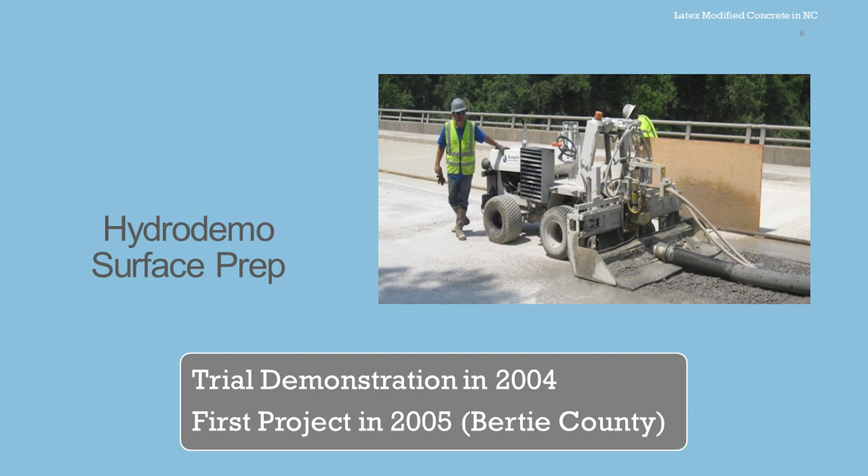I did get some help. North Carolina DOT, Aaron Earwood, sent me a few photos and some information. This looks like one of the first adventures with hydro-demolition here in North Carolina in 2004, a demonstration project out in Bertie County, which is in the eastern part of the state, up there in District 1.

What I did was, Hydro-Technologies here, through about the last 10 years, has been kind of taking in data as the lettings come out from various states. So I was able to latch on to some of that and pull the information I could out of the North Carolina side of the lettings, to show projects and bridges that had been let in the last 10 years or so using hydro-demolition technology.

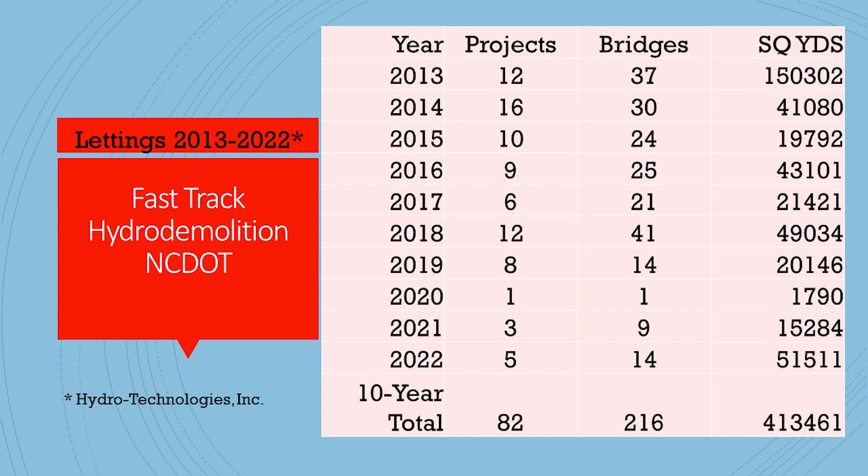I think it's fairly decent. It could be off a little bit, but at least it gets you in the ballpark as far as what amount of work is being processed through the DOT. So you can see about a little over 400,000 square yards of hydro-demolition work, 82 projects, 216 bridges. Pretty good chunk. And for the southeast region, I'd say that's probably leading the region as far as the states that are active. Virginia's probably pretty close right behind there too, I would say.

Just another look at data. I kind of broke it down by districts. Might be kind of hard to see on the screen, but you don't see nearly as many bridges done in the eastern part of the state. I think that leads back to the discussion yesterday about the number of bridges and the size and conditions you encounter from east to west.

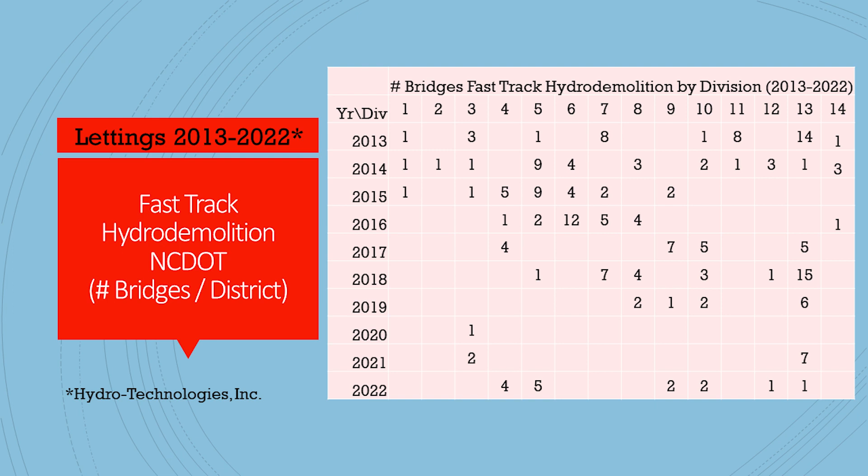The western side gets a lot more deterioration, and there's longer bridges, so you'll see more square yardage, possibly like in District 1. They've got a pretty big bridge there, it looks like that they did. So you don't have as many bridges in the east, but you have bigger bridges with a lot more area. It just kind of shows you the trend there.

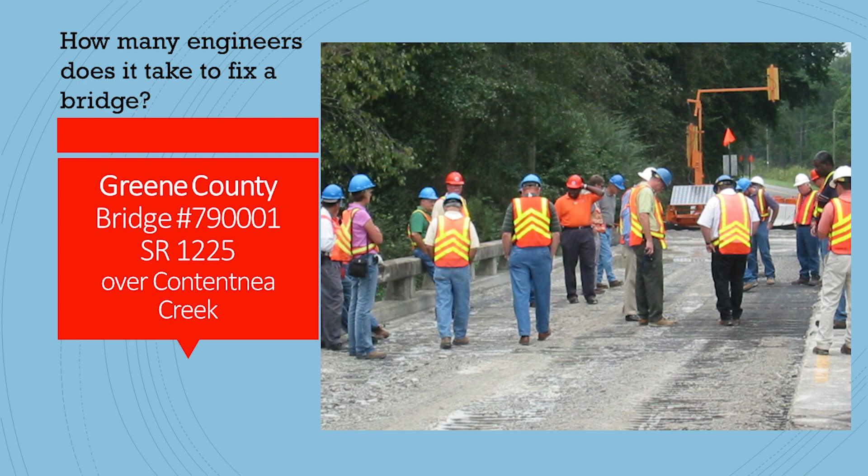So just to highlight a few of the bridges, this is from Greene County, one of the very first bridges undertaken by the department. When you get a new process, new products, everybody out of the office wants to go out there and kick the rock around and stomp on the rebars, to see what the new toy is all about. This was a fairly modest bridge, 241 feet long, fairly low ADT, not a real big bridge, but a good starter bridge to get the process going and see how the whole thing works.

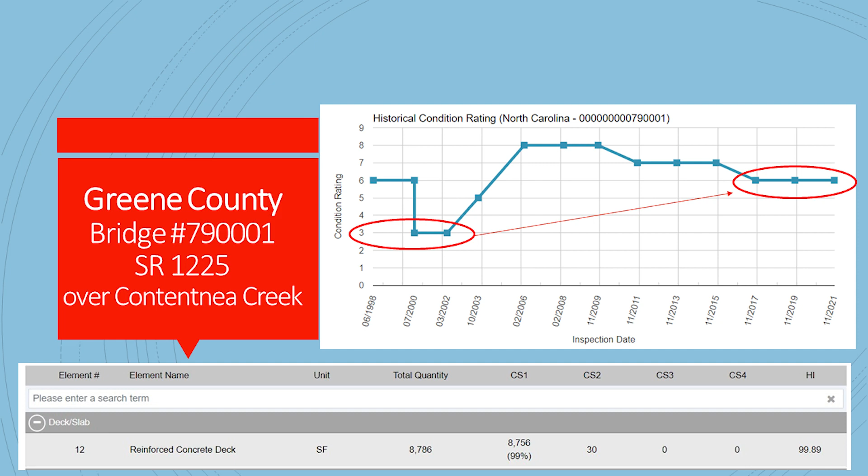What I'd like to do is dig into the data a little bit to see how it performs. It looks like this bridge was actually down in condition 3 as far as the NBI rating for the deck, according to the Info Bridge data I pulled up from the federal data. But it looks like after 15 plus years or so, you're still holding a 6 on that bridge. So it's doing its job.

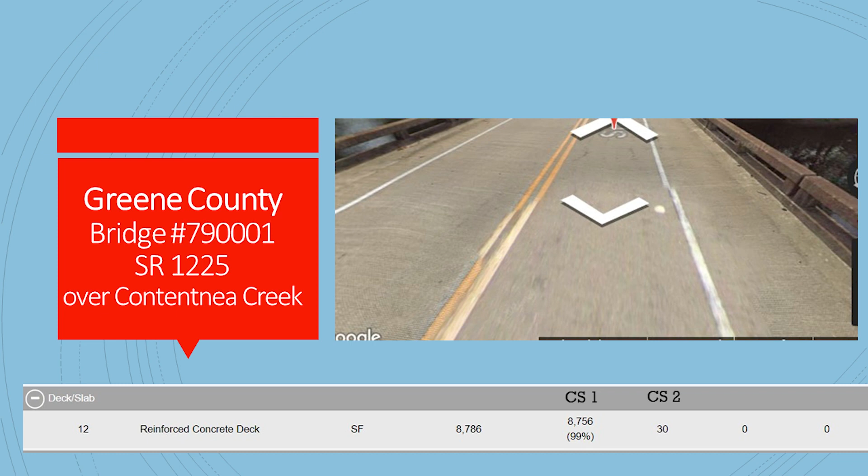You take a 3 or 4 rated deck, that's pretty deteriorated, and trying to salvage those things can sometimes be pretty tough to do. Really, they're kind of deck replacement at that range. But a lot of times you just have to do what you have to do to keep the bridge open. So this is just a screenshot from Google Maps.

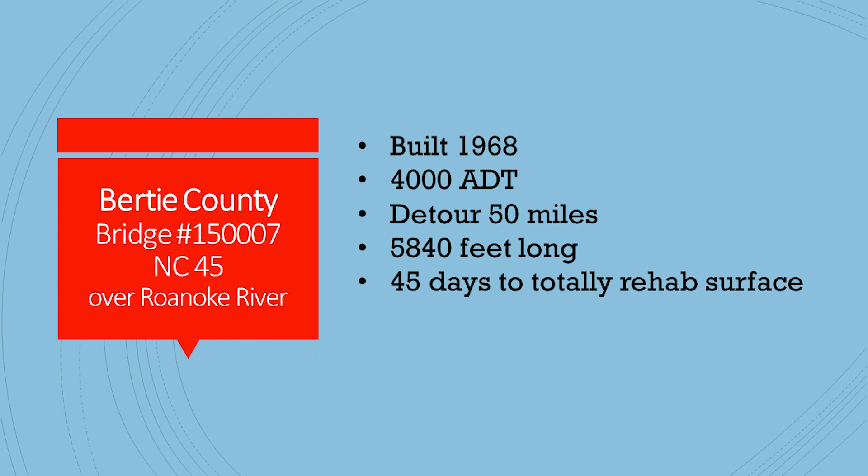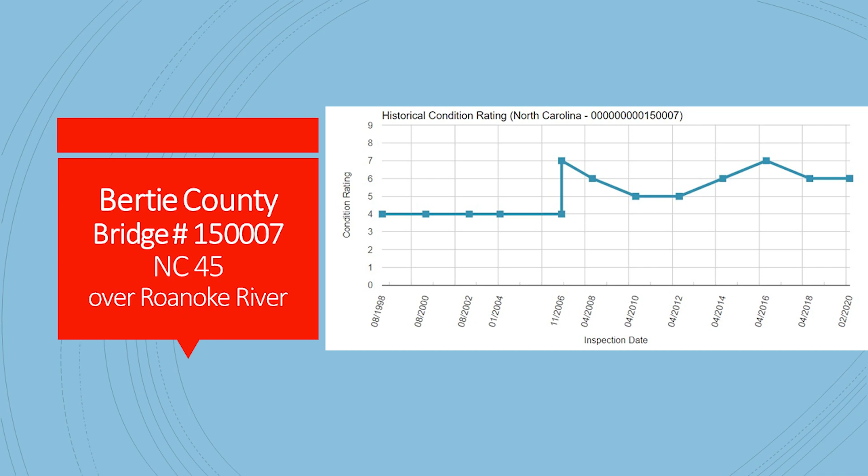Another bridge out in Bertie. This was a pretty good size one out over the Roanoke, a little over a mile long. 45 days to totally rehab the surface. One thing I noted there was the detour, 50 miles to get around there, 4,000 ADT, and a 1968 vintage bridge. Again, you're looking at a deck that was in the 4 range, but now it's still holding in there at about a 6.

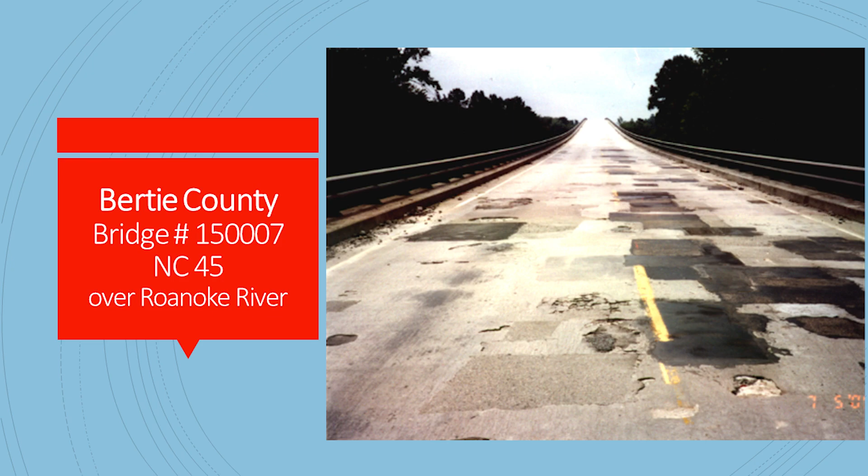So that's pretty good performance for an old bridge. I tried to go into some of the element level data to see if I could pick anything out of there. Kind of hard to get a lot, but you can see the slab itself, for the most part, is still in condition state 1. These are some of the pictures from that bridge. If you look at that you see what you have, you got a real minefield there. So a little bit of the operation to mill it and to hydro.

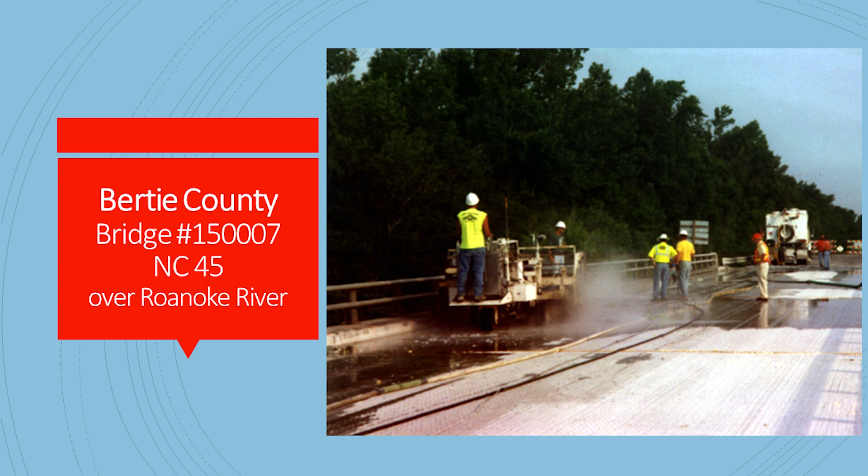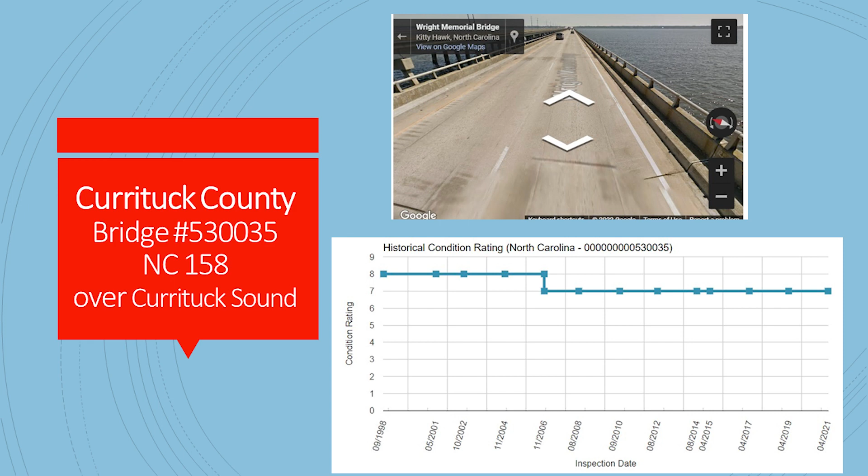Another one up here in the far northeast, Currituck. Actually, Rick Nelson kind of tipped me off to this one. He mentioned this was one that had a really rough ride in it. So this wasn't necessarily a bad condition, it just wasn't riding very well. Hydro and latex was used to get it smoothed out and riding better. It was about a 2.8 mile long structure, looking at a lot of square footage there.

And then one more, since we were down in the Carolina Beach area, might as well take a look at it while we're there. I was able to get some shots out there Monday. This is down there over the Intracoastal Waterway.

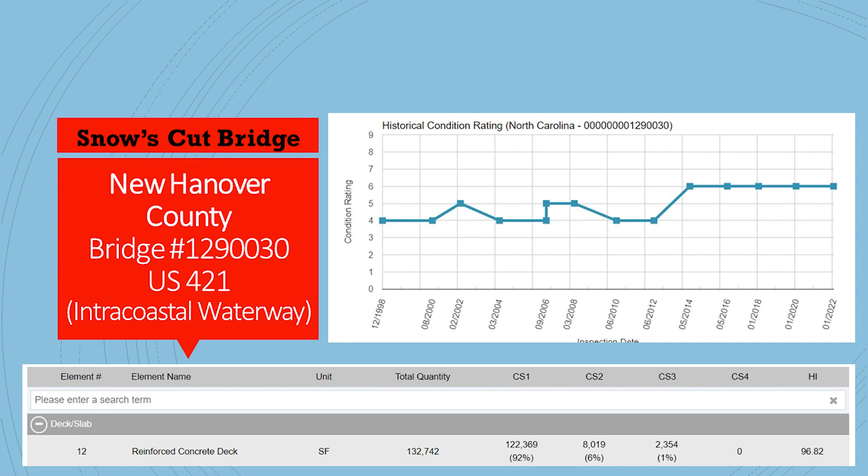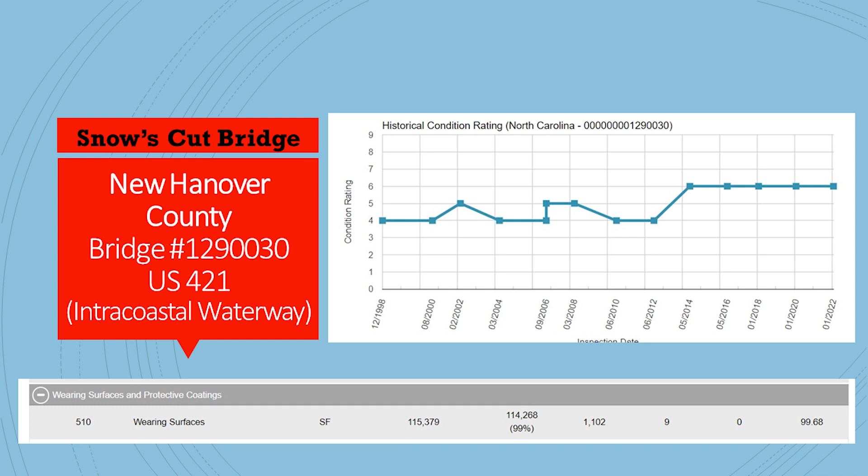About a half-mile long bridge, 132,742 square feet of deck. This one was done back in 2012, so about 10 years on the bridge. It went from a 4, and it's hanging in at a 6 right now. The deck, the wearing surface data shows most of that is still in condition state 1, with a little bit in condition state 2.

One of the challenges I was finding as I was going through the data is I'm pulling data from item 108 out of the federal tape, which is the wearing surface on the structure. I'm looking for code 3 for latex modified concrete overlays. What I'm finding, and this isn't unusual, it's not just North Carolina, I find this in a lot of states, is when we go in and hydroblast and put on a new latex modified concrete wearing surface, we're essentially reestablishing the deck slab itself.

It's not like the traditional means we used to use where you'd just mill and patch and then put a true wearing surface on. Now we're actually reestablishing the slabs. So what I'm finding is agencies are basically coding it as monolithic, code 1. That makes it very difficult to track and pull data out to find out how those bridges are performing that have hydro-demolition surface prep on them. It's just a little tougher, and I guess that's something agencies kind of deal with internally as far as how they accumulate that information.

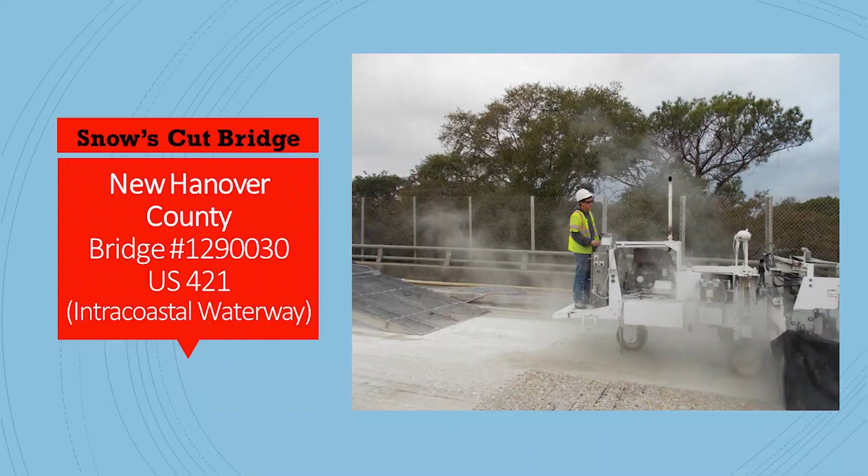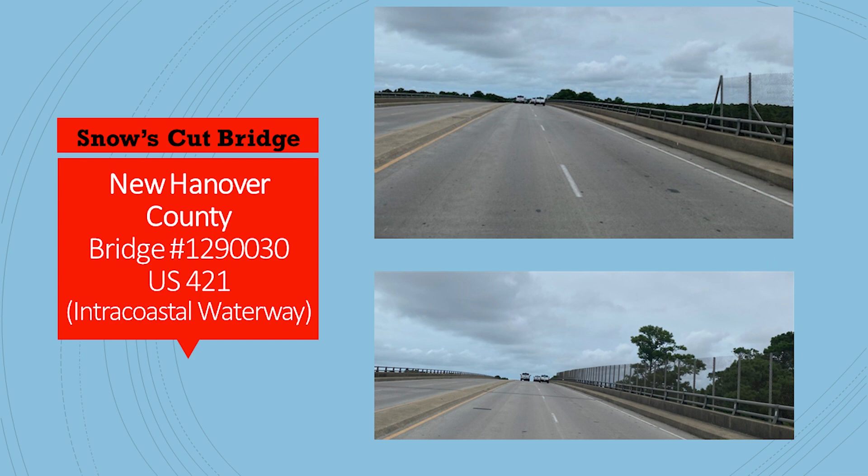This is from that intracoastal waterway, just some shots of the surface itself. It looked pretty good. I walked a good portion of it and couldn't even really find any cracks in it, hardly. There were a few minor patches out there, and one expansion joint that looked like it had some repair work done to it possibly at one time. But overall, looking pretty good.

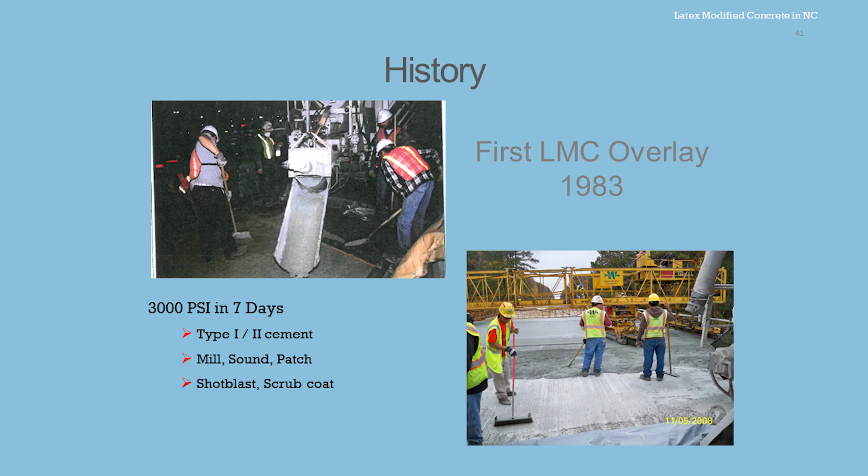So I talked a little bit about hydro-demolition. Let me switch gears and talk about just latex modified concrete wearing surface. The history on this in North Carolina goes back to the early 1980s, which is pretty similar to a lot of states. A lot of states were doing this back in the 1980s timeframe using type 1 cement. The process back in the 80s and 90s was typically you'd mill, sound, get in there with jackhammers and patch it out, reestablish your deck surface, and then go in and do your final cleaning, apply a scrub coat, and lay your overlay.

The nice thing about when we got into hydro-demolition, we were able to eliminate the application of the scrub coat. Plus we're getting a lot more bondable surface area, and a lot better surface preparation, I believe, for your overlay installations to hang onto there.

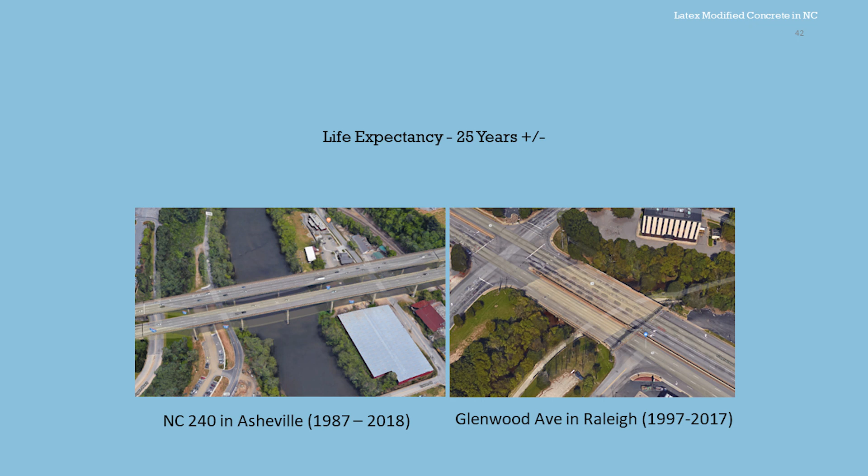Just a few pictures - these are a couple Aaron had passed on to me. Some bridges have been out there 20, 25 years in life, that's kind of what the expectation is for most of these overlay systems. I will say, I think the sooner you can get into the bridge deck and get your overlay on before it deteriorates, your odds of getting more life are greatly enhanced. I know some new bridges that latex overlays have been installed on have been out for 35, 40 years and have very minimal to no chloride intrusion into the decks.

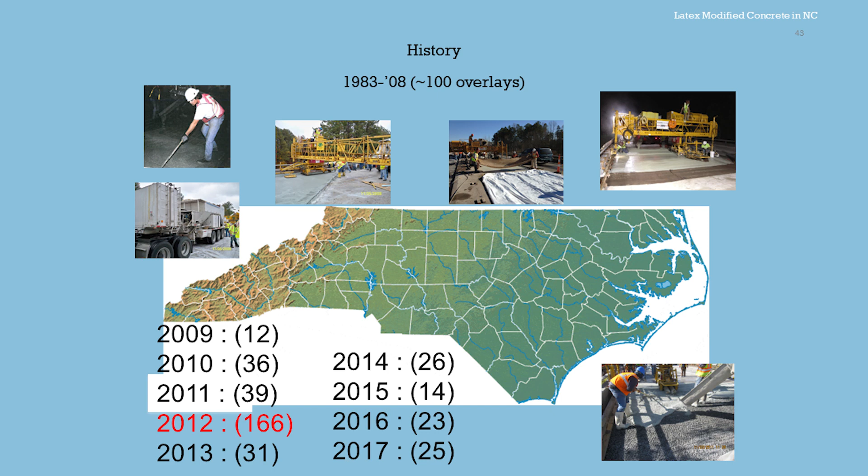This is a look at the number of overlays out there. Looking at the time period from '83 to '08, probably did about 100 or so in the state of North Carolina, and then you can see in 2009 through '17, that number has increased quite a bit through those years.

I was out looking at several overlays, actually several dozen overlays in the Raleigh area, and that's where I started to find the discrepancies in the data, which got me investigating the coding a lot more.

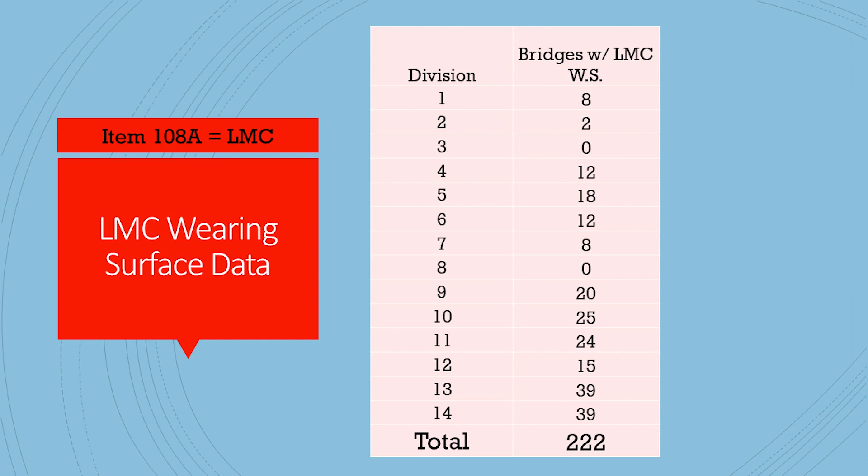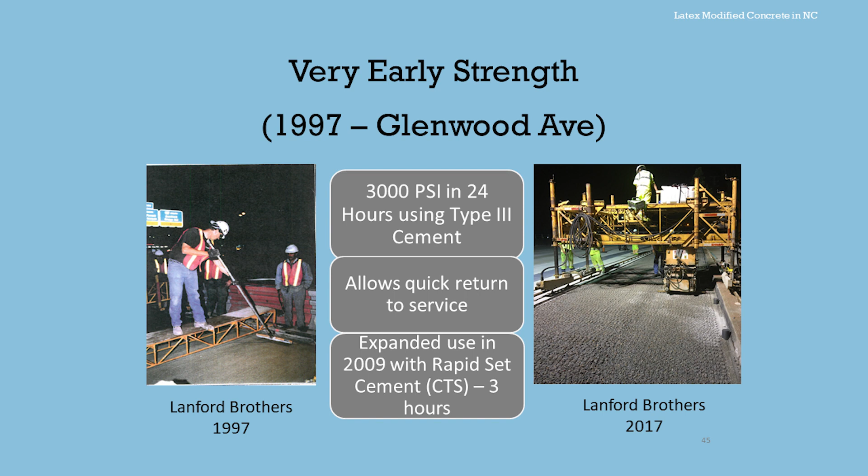The wearing surface data within North Carolina's tape looks like it shows about 222 installations, so I think a lot of those hydro installations aren't showing that latex surface that's also on those particular bridges. And then the very early high strength latex mixes came into play in the late 90s, including use of type 3 and also the rapid set, which is a 3-hour strength gain.

So I've got several charts here. They're real hard to read here, so I'm just going to breeze through those.

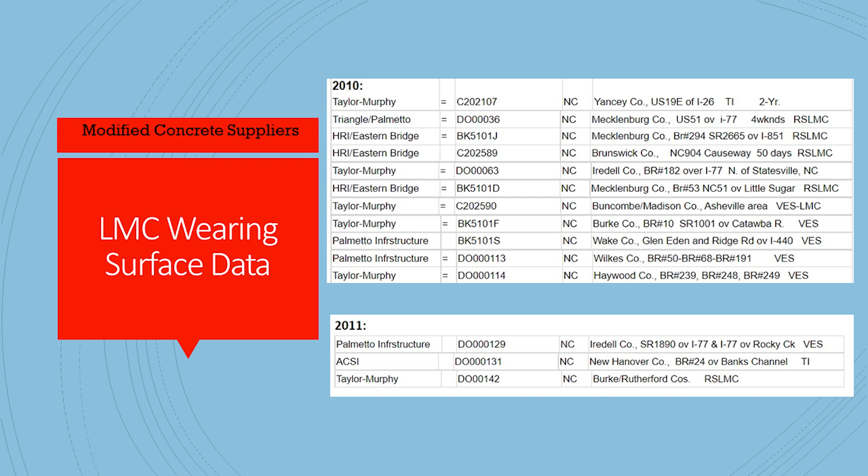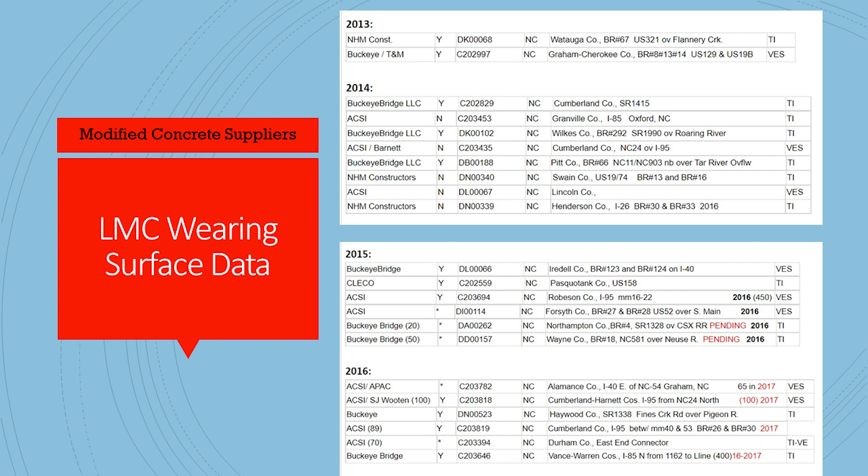What these are showing is Modified Concrete Suppliers, one of the producers of latex modified concrete, and jobs they've done in North Carolina - this is data from their database. What really stood out to me is how many of these overlays are done with rapid set. I'd say North Carolina is really the leader in this field when it comes to installation of rapid setting overlays.

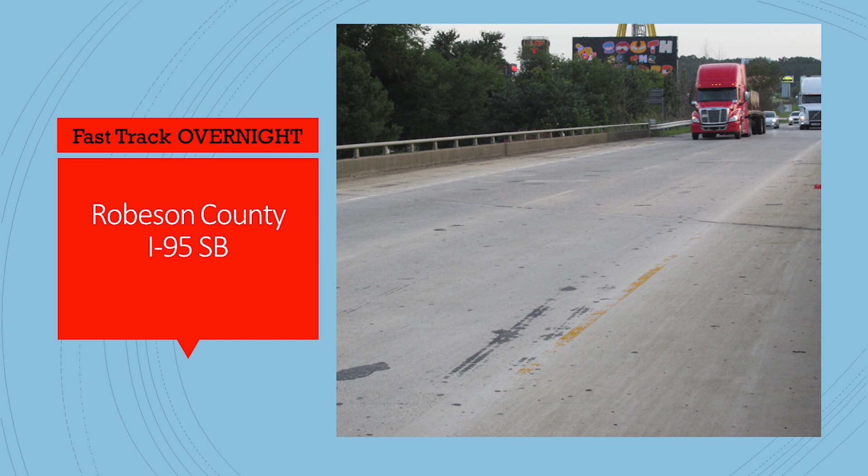So for the remainder of the time here, I just wanted to talk briefly about what you guys in North Carolina are doing with overnight work, kind of on-call work. We see this a lot in Virginia as well, and it's a pretty slick process.

You go in there and you have a very limited window. In this particular case in Robeson County, it looks like 7 p.m. to 6 a.m. is the working time period. And you need contractors that know what they're doing for sure out there - you don't want just anybody trying to do this.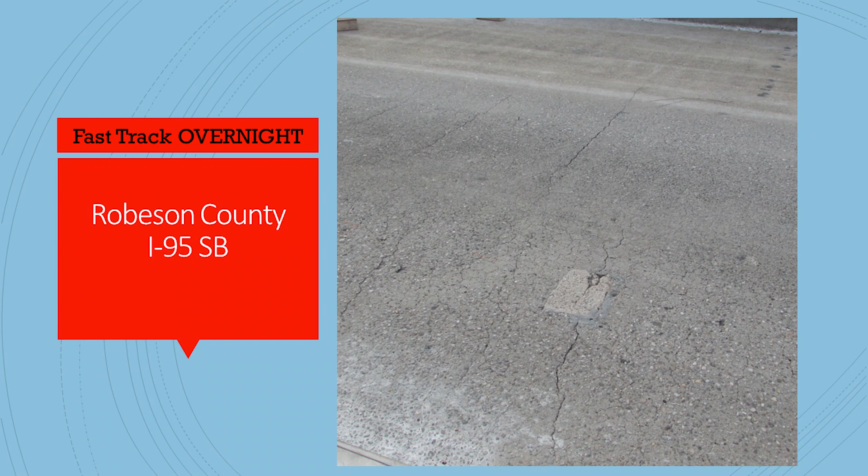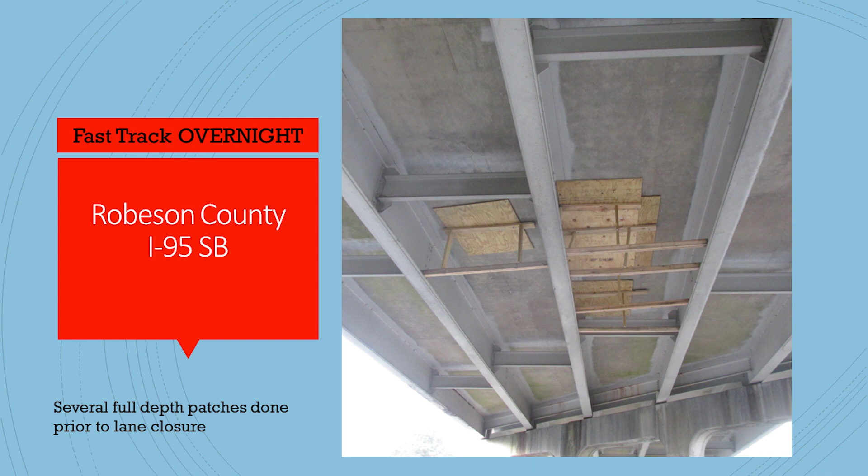You're looking at bridge decks with a fair amount of deterioration often, so you have to be careful about the potential for full depth repairs out there. In this particular case, the contractor was able to do some full depth work out there prior to getting out and doing the hydro-demolition, which helps to expedite that process in an overnight application.

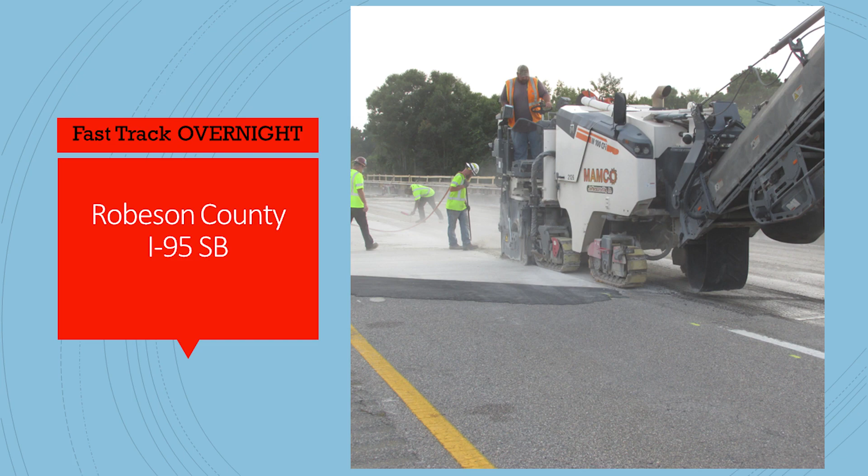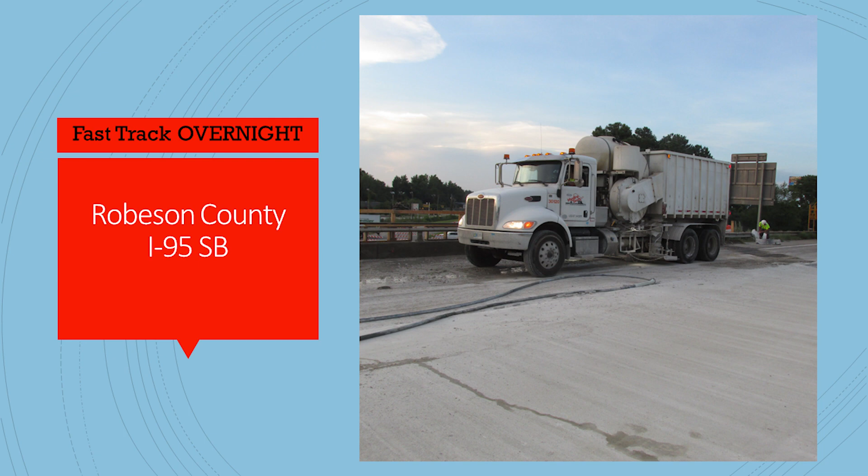So you're going to get out there, first thing you're going to do your milling, and then you're going to get in with your hydro-demolition. He's probably out there - if he's dropping the lane at 7, he's milling shortly thereafter, and probably by about 8 he's getting that hydro-blaster up and running. It's going to take him several hours to hydro-blast and also do his vacuum collection, probably about a 3-hour window there to do that.

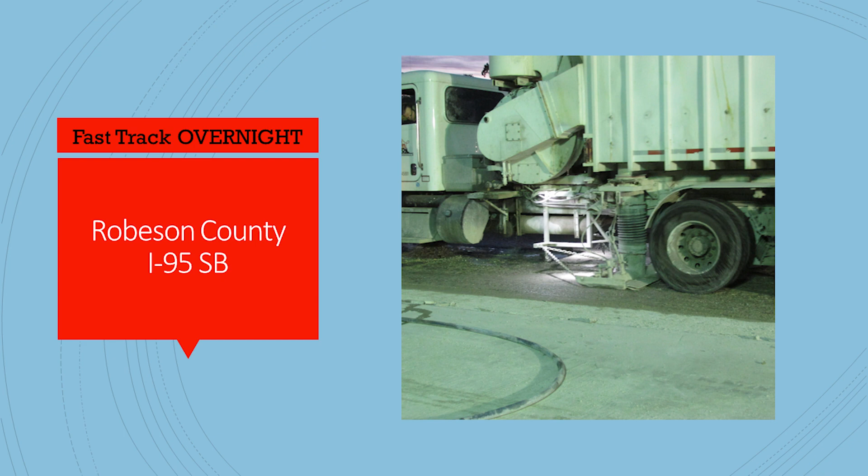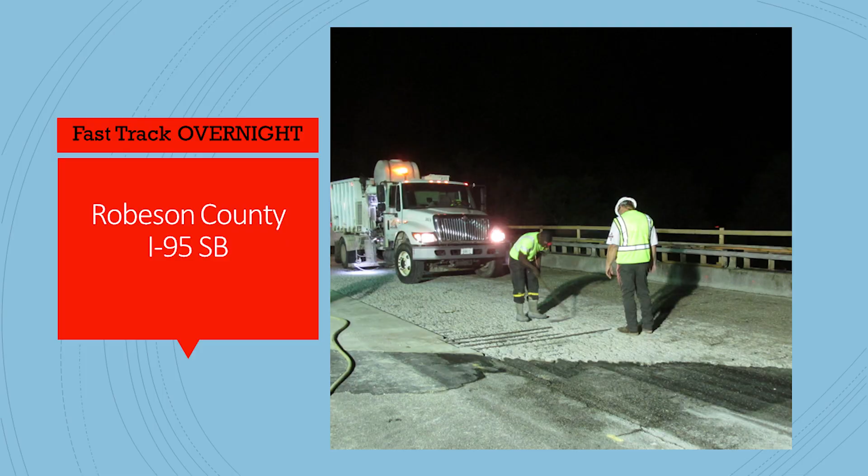And then you're going to vacuum all that material up, get yourself a good clean surface. Here the crew's out just spot checking, trying to make sure there are no delaminations left in there, because if there's delaminations left in there and you don't get them out, that's a potential failure area for you - a premature failure that you don't want to have to encounter.

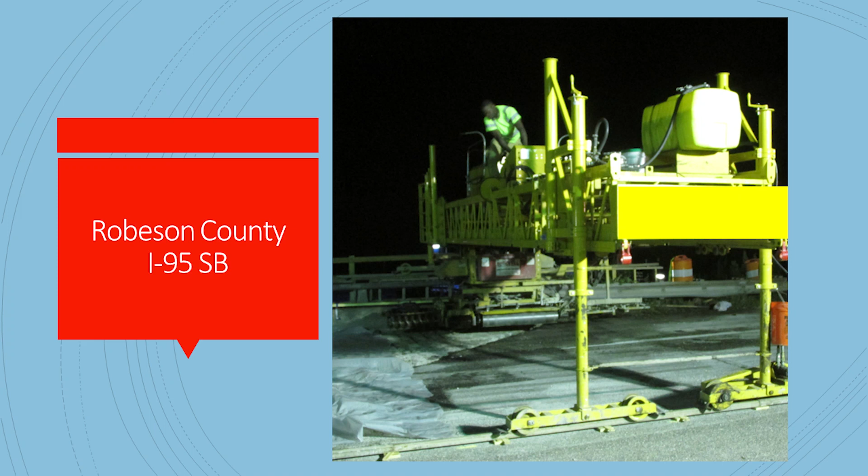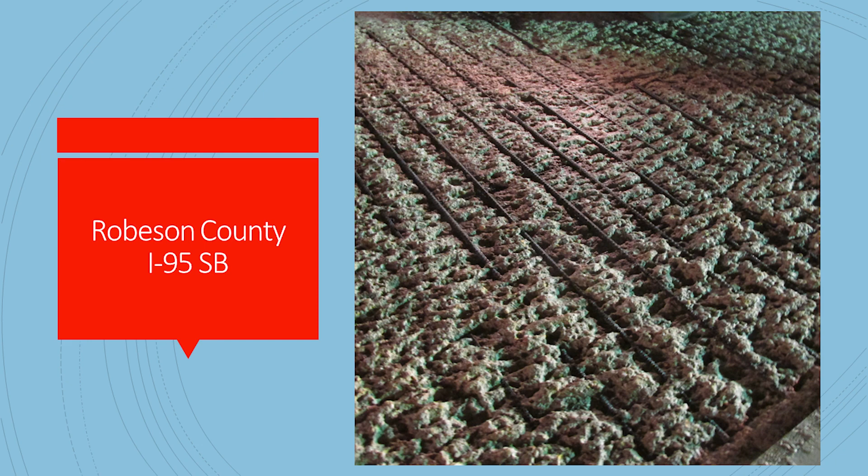Getting the finish machine set up. Here they're going in with a high pressure water blaster as a final source of cleaning, generally running about 10,000 psi or so, to get it good and clean and then saturated and covered.

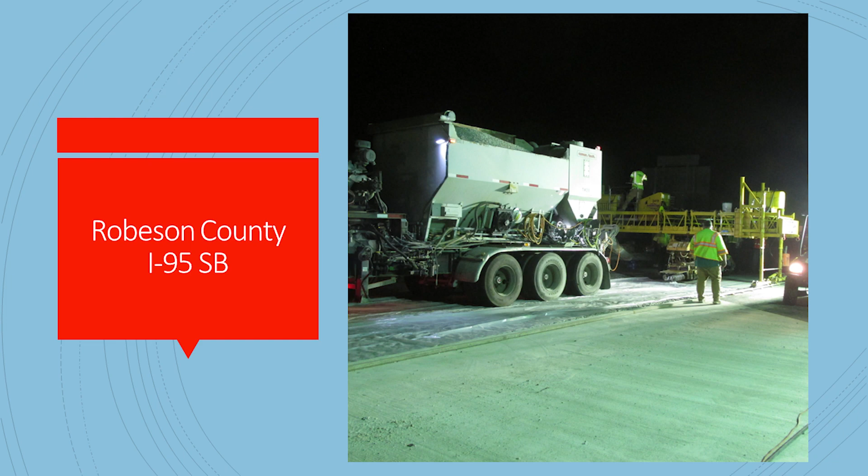And then what you're going to do is run your mobile mix truck out there, because all this material is mobile mixed - it's not going to be a ready mixed product. That mobile mixer is going to back right up to the machine, he's going to dump it, and he's going to place and finish the latex. A couple shots of that.

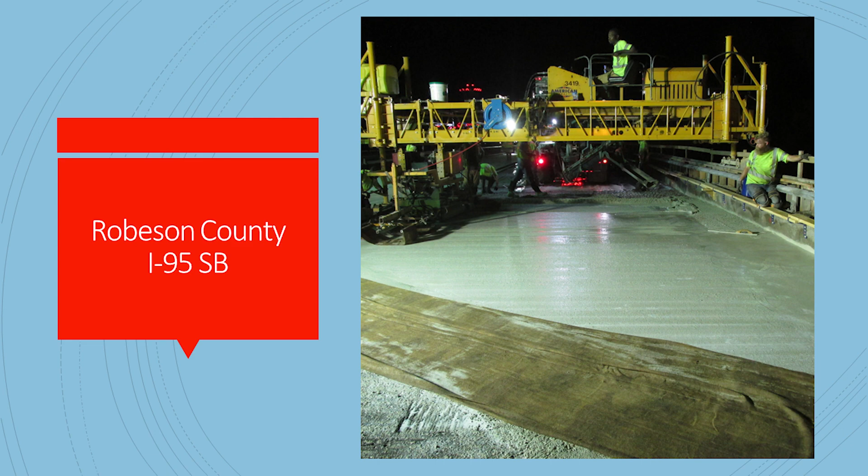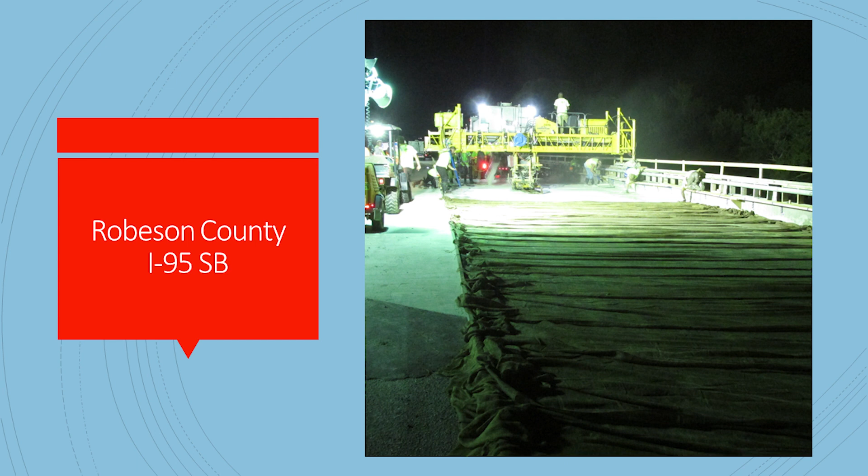The burlap curing is an essential and very critical part of the operation. They have to get good saturated burlap on very fast, get it covered as quickly as possible, and keep it saturated for the 3-hour minimum curing period required for the rapid set latex material. By 6 a.m. they're opening it up, or they're facing very high liquidated damages they do not want to take on.

So just to summarize quickly, North Carolina has been in the hydro-demolition business since about 2004, going very strong. They've been doing LMC for a long time and have a lot of good qualified contractors, which really helps them get some really good installations in their state.

You guys are identifying these as monolithic applications on your NBI data. So data collection is a little hard to track, but it's important to understand where you do have those, because if you're going to continue using a product and process, you need to know how well it's going to work. If you don't have a way to track that, it's difficult to do.

I'd say North Carolina is definitely one of the leaders nationally in rapid installation type projects. I don't know any other state doing as many, especially overnight projects, as North Carolina does. Virginia has been doing quite a few here in the last 5 or 6 years.

Louisiana has done a fair amount over the years. They haven't done many lately, but interestingly, Louisiana did some of the early rapid set installations back in the late 90s and 2000-2001 timeframe. I was actually in Shreveport and did a presentation for the district there.